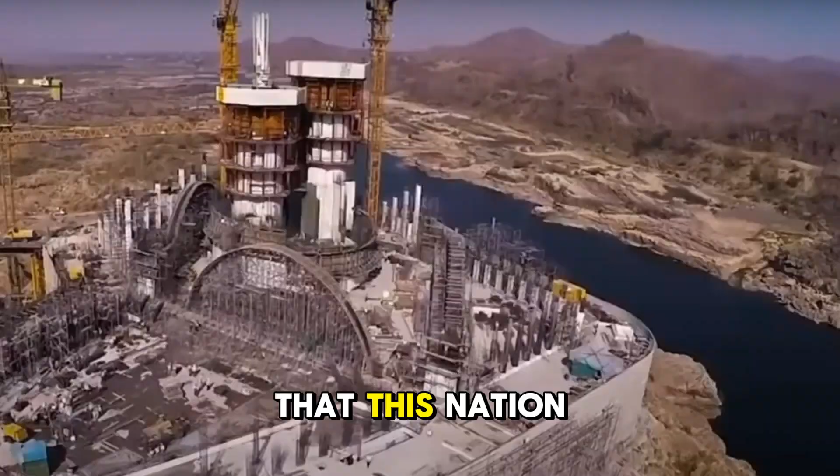In the early 2000s, as nations across the globe competed to create ever more impressive architectural wonders, a bold vision took shape in the minds of a country's leaders and cultural architects. This would not be just another statue. It would be a statement carved in bronze and stone, a declaration to the world that this nation had arrived on the global stage as a force to be reckoned with.

The chosen subject was no random historical figure, but a beloved national icon whose life and teachings had shaped the country's identity. The selection process itself was a study in national psychology: months of deliberation, public surveys, and heated debates among historians and politicians. Would it be a warrior king from ancient times, a spiritual leader whose philosophy endured centuries, or perhaps a modern unifying figure who led the nation to independence? The final choice reflected not just historical significance, but contemporary political currents and the nation's desired image on the world stage.

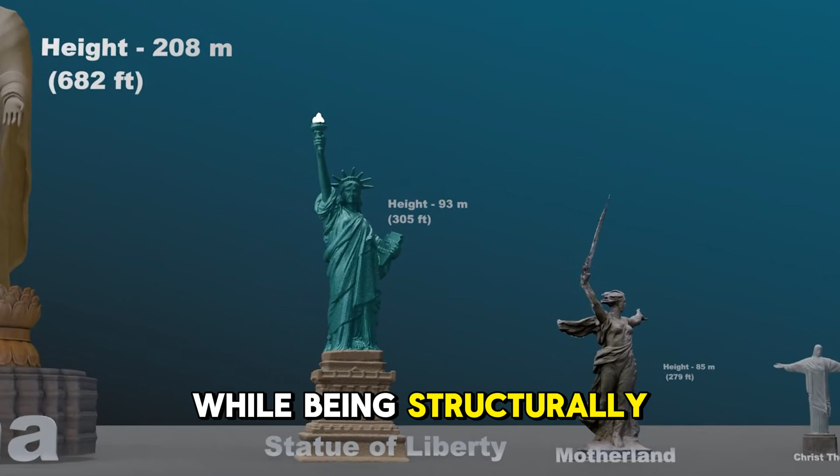Blueprints of the impossible. Designing a titan: with the subject chosen, the real challenge began — how to translate this vision into physical reality. The design team, comprising the nation's top architects and international engineering consultants, faced a paradox. The statue needed to appear graceful and inspiring while being structurally capable of withstanding forces that would destroy lesser constructions.

The initial sketches went through hundreds of iterations. Early concepts showed the figure in dynamic poses, arm raised in blessing, or striding forward, but these were rejected as too unstable at such scale. The final pose represented a careful compromise between artistic vision and engineering necessity — a dignified, stable stance that could withstand high winds while still conveying power and benevolence.

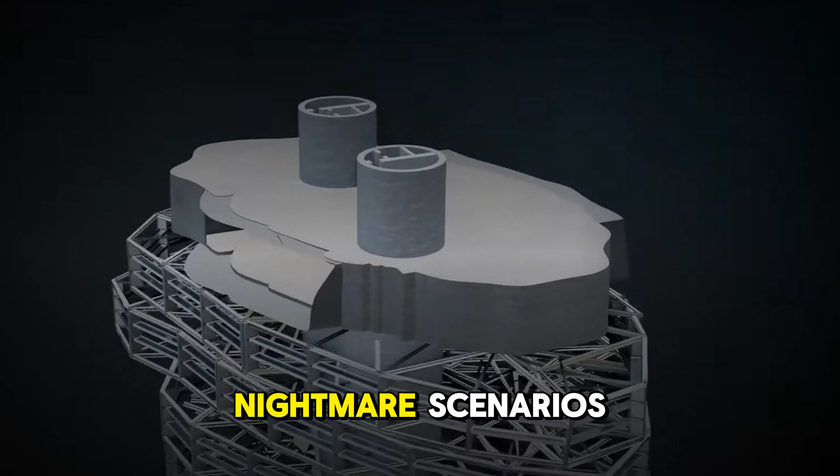Computer modeling revealed nightmare scenarios engineers had to solve: wind vortices creating dangerous oscillations at certain altitudes, thermal expansion causing metal panels to warp and buckle, differential settling of the massive foundation potentially twisting the entire structure, and lightning strike probabilities approaching certainty at such heights.

The solution was a radical rethinking of traditional statue engineering. Instead of a solid core, the internal structure would be a hollow lattice of reinforced steel, carefully tuned to absorb and dissipate energy. The outer bronze skin would consist of thousands of individually cast panels, each with precisely calculated expansion joints. The foundation would employ techniques borrowed from offshore oil platforms and nuclear power plants — deep pilings reaching down to bedrock, with sophisticated damping systems to counteract seismic activity.

The foundation: building on shifting sands of reality. Groundbreaking ceremonies made for excellent photo opportunities, but the real work began unseen, deep underground. The foundation team faced geological reports that read like horror stories — layers of unstable sediment, underground water channels, and worrying seismic activity forecasts.

The solution was a foundation so massive it defied comprehension: over 50,000 cubic meters of high-grade concrete, steel reinforcement bars totaling enough length to circle the equator, a network of sensors monitoring pressure and movement at 200 different points, and earthquake dampers adapted from technology used in Tokyo's tallest skyscrapers.

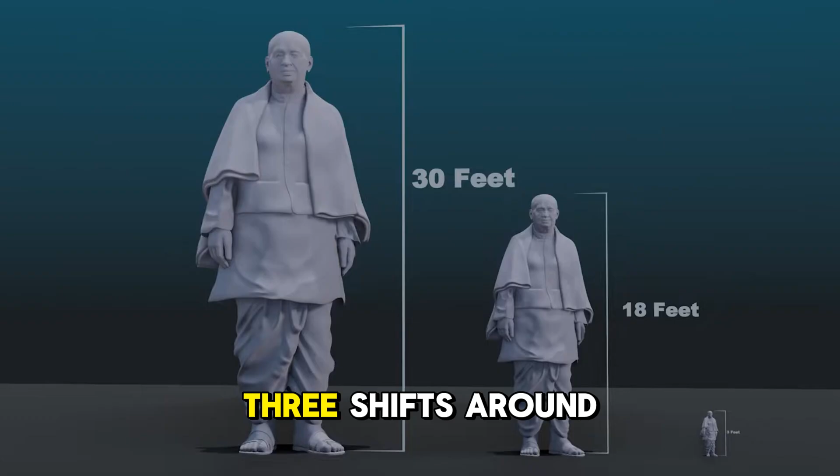Workers labored in 3 shifts around the clock, battling monsoon rains that turned excavation sites into muddy quagmires and summer heat that made the steel reinforcements too hot to touch. The concrete pours required military precision — any pause in delivery could create weak points where layers failed to bond properly. On the largest single pour, a convoy of 150 concrete trucks rolled in continuous procession for 36 straight hours.

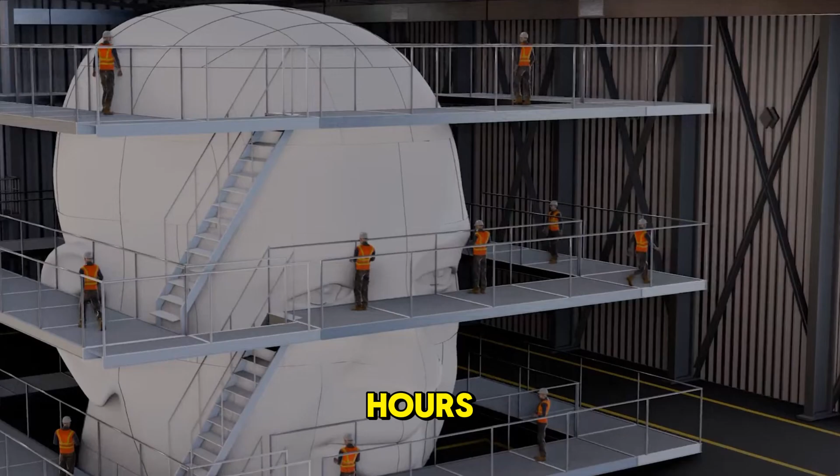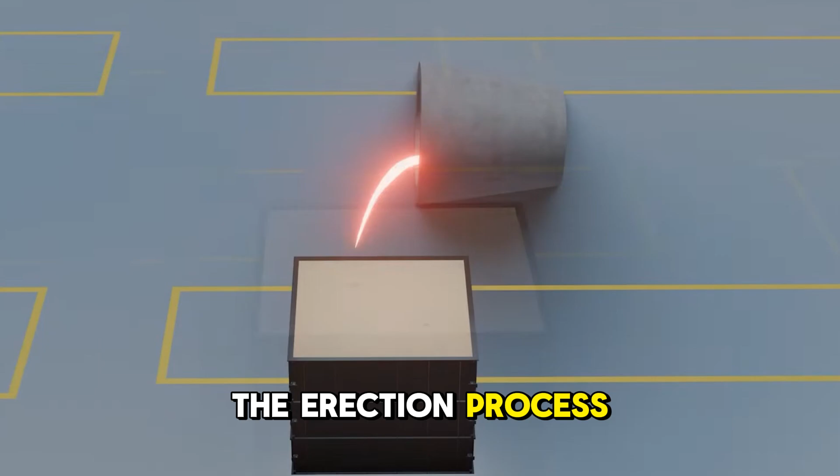Rising steel: the skeleton takes shape. As the foundation cured, a process carefully monitored by ultrasound and thermal imaging, attention turned skyward. The steel framework rose in sections, each requiring millimeter-perfect alignment. The erection process resembled a bizarre hybrid of bridge building and ballet.

100-ton cranes leased from international heavy-lift specialists, laser alignment systems accurate to 0.1 millimeter over 100 meters, teams of sky welders working on suspended platforms hundreds of feet in the air, and real-time wind monitoring that could halt work at a moment's notice. The steel itself was a custom alloy, developed specifically for this project.

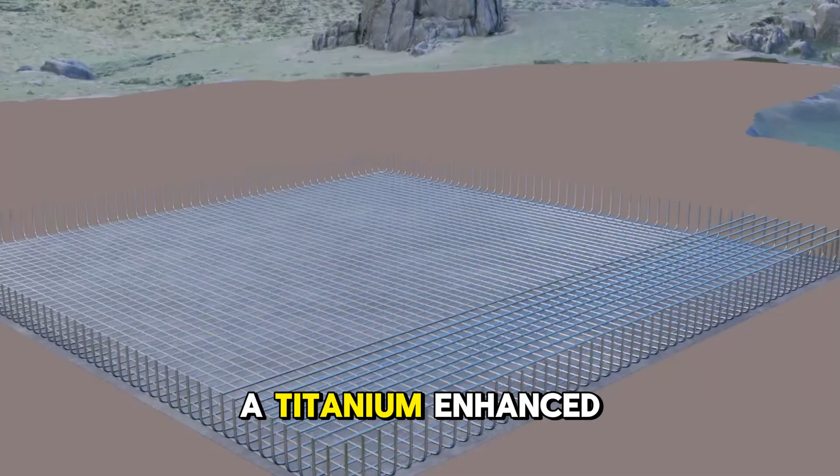Traditional structural steel would have been too heavy at these heights, while lighter alloys lacked the necessary strength. The solution came from aerospace technology, a titanium-enhanced steel that maintained strength while shaving critical tons from the overall weight.

The skin of a giant: bronze alchemy at scale. While the skeleton grew, foundries across the country worked feverishly on the statue's outer skin.

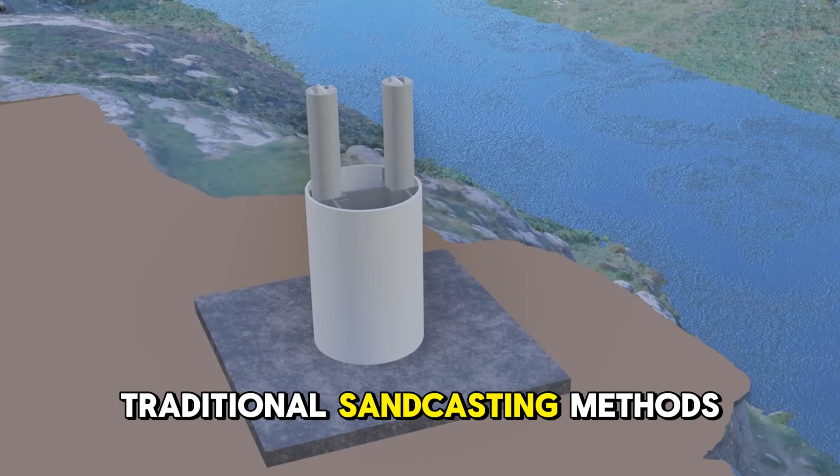The bronze cladding presented challenges that hadn't been faced since ancient times, just vastly magnified. Traditional sandcasting methods couldn't maintain consistency at this scale. The alloy composition had to balance durability, color retention, and workability. Each panel's thickness varied based on its position and expected wind loads.

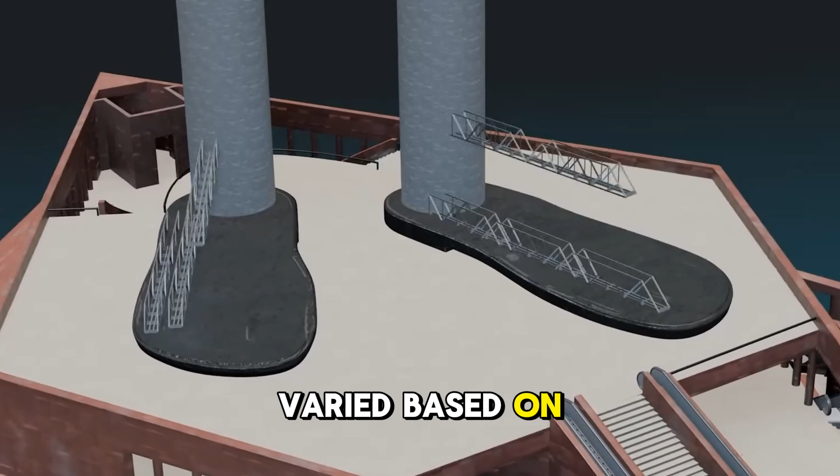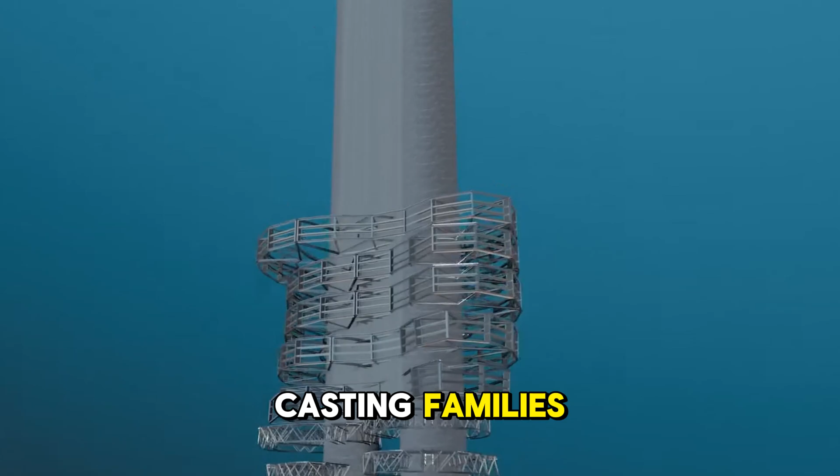The solution was a combination of ancient craftsmanship and cutting-edge technology. Master metalworkers from traditional bronze casting families collaborated with materials scientists to develop new techniques. Robotic arms assisted in the precision pouring of molten metal, while artisans hand-finished each piece to ensure perfect surface quality.

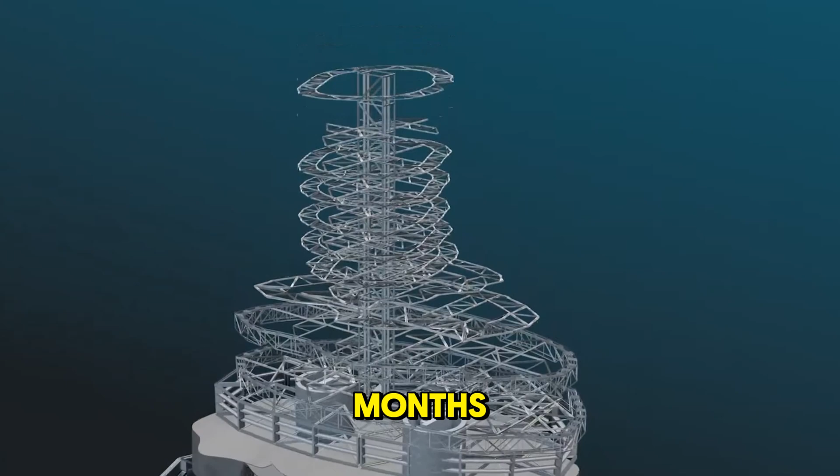The patina, the statue's final color, became a subject of intense debate. Accelerated aging tests simulated decades of weathering in months, showing how different alloy mixes would change over time. The selected formula would mature from its initial bright bronze to a dignified, slightly greenish hue within 5 years of exposure.

The eyes of the world: installation and final assembly. As the first bronze panels began their ascent to their permanent positions, the project entered its most visually dramatic phase. Each piece had to be precisely aligned, using GPS-guided positioning systems, secured with custom-designed expansion joints, sealed against moisture intrusion with space-age polymers, and electrically grounded to prevent lightning damage.

The face, always the most scrutinized part of any statue, required particular care. Cast in just 3 massive sections, unprecedented in bronze casting, its assembly had to be flawless.

When the final piece was lowered into place, held by cables so fine they were nearly invisible, the site fell silent. Then, as the sun broke through the clouds, illuminating the completed visage for the first time, spontaneous applause broke out among the hundreds of workers present.

Controversy and criticism: the price of ambition. Even as construction progressed, the statue became a lightning rod for debate. Economists calculated that the total cost could have built modern hospitals, 300 schools, clean water systems for every remote village in the country, or funded a decade of scientific research grants.

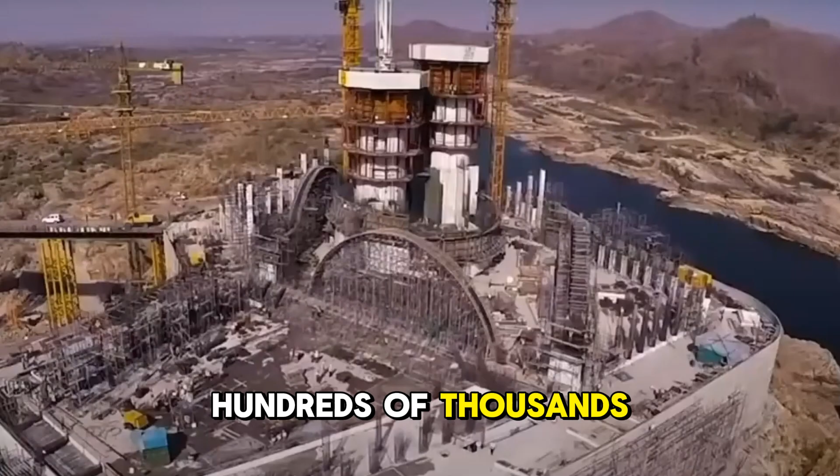The ceremony blended ancient traditions with modern spectacle. Religious leaders offered blessings according to multiple faiths. Military honor guards performed precision drills. Children's choirs sang a specially commissioned anthem. Dignitaries from dozens of nations looked on.

When the shrouds finally fell away, revealing the completed colossus in the golden light of late afternoon, the reaction was visceral. Some wept openly, others stood in silent awe. Camera shutters clicked like mechanical crickets as the first official images flashed around the globe via satellite.

Engineering triumphs, by the numbers: total height 600 meters including pedestal. Weight over 40,000 metric tons. Bronze used, enough to cast 5,000 life-sized statues. Construction time, 5 years, 2 years ahead of initial estimates. Workforce peaked at 3,500 workers simultaneously on site.

Safety record: 0.78 accidents per 200,000 work hours, industry-leading.

The future: preservation and evolution. Now complete, the statue faces new challenges: ongoing maintenance against weathering and pollution effects, developing tourist infrastructure to handle millions of annual visitors, protecting against potential security threats, and managing the surrounding area's development.

To prevent visual pollution, conservators are already planning for centuries of preservation, using lessons from ancient monuments that have survived millennia. Advanced coatings that self-clean in sunlight, AI-assisted structural monitoring systems, and sacrificial anode corrosion protection all play roles in this long-term strategy.